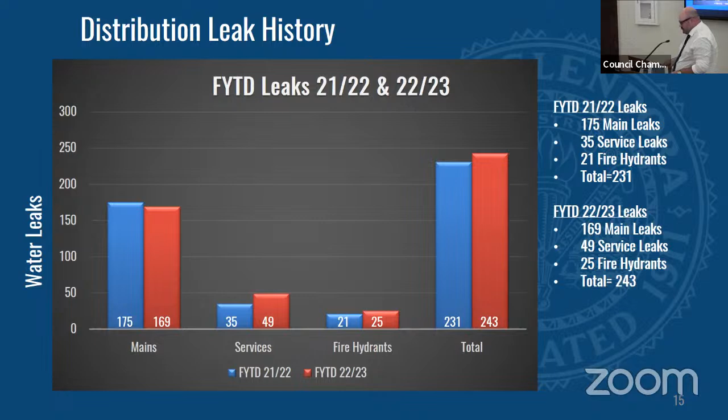And then the overall lookout compared to 21-22 and 22-23 fiscal year to date. Again, blue represents fiscal year 21-22 and red represents 22-23. As of now, compared to last year, from first to third quarter, we are ahead in leaks, and we're just getting more leaks in the past month. So I'll be happy to provide the fourth quarter leak history next meeting.

So here are some notable third quarter water projects that have happened in the past 3 months, in no particular order, and I'll go through these as we proceed. We have the Grand Avenue Arrow Highway emergency project, the 407 West Bennett Avenue fire hydrant blowout, and the Wildwood Canyon Road 6-inch valve replacement. We'll also be looking at our staffing look ahead for water distribution.

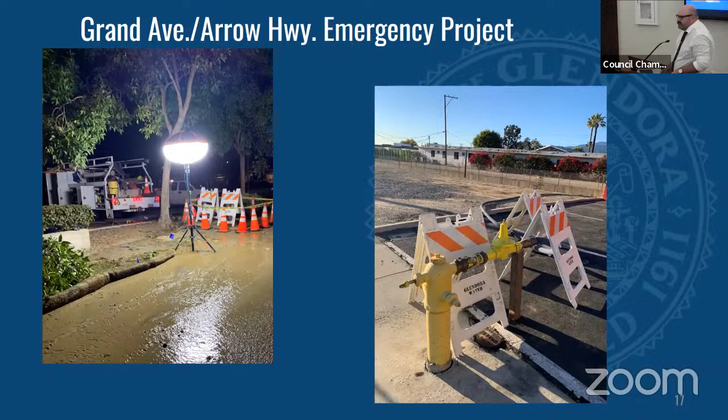From there, we had to isolate that section of line, which was about 200 to 300 feet of 4-inch steel line. It then turned into a 6-inch AC line, which went under the San Dimas wash right there on Arrow and Grand. Because we had to shut that down, we did have to temporarily feed 4 businesses off of Arrow Highway, which you'll see on the picture on the right—that's the highline temporary service feeding those 4 businesses.

That work was completed just recently, at the end of March, and that line is now in service, feeding the 4 businesses right now.

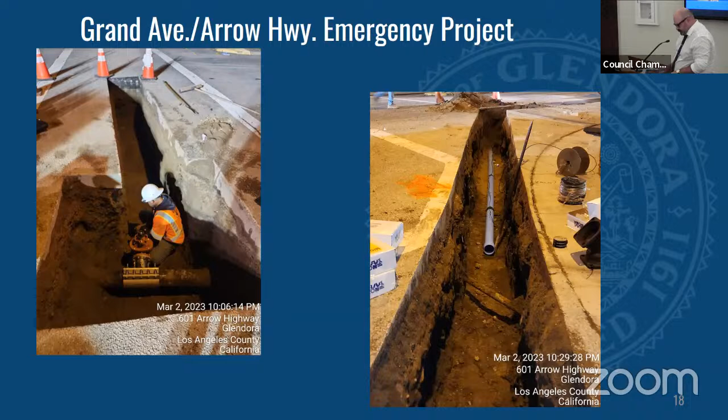Luckily for us and the community, that area is planned for a water CIP, which will most likely get done next summer, and that whole line will be replaced.

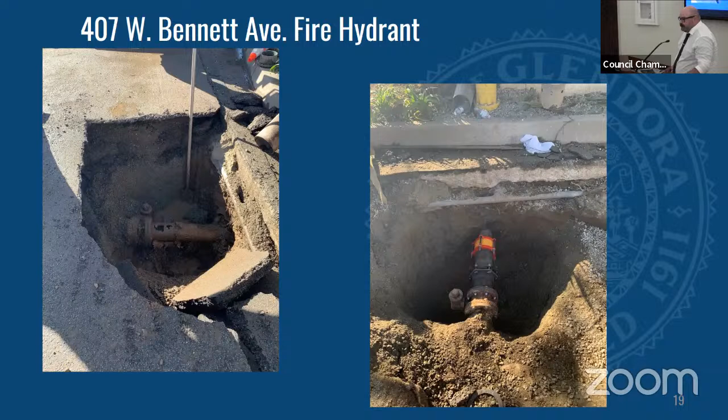So this is our distribution staffing look ahead. Most recently, for 3rd quarter, we did hire 3 new water operators for the distribution crew, and this is the first time in a few years that we are starting to run 2 crews. In the last 3 weeks, we just started running 2 construction and leak repair crews, and we also have 1 position we're filling right now, for the 3rd lead.

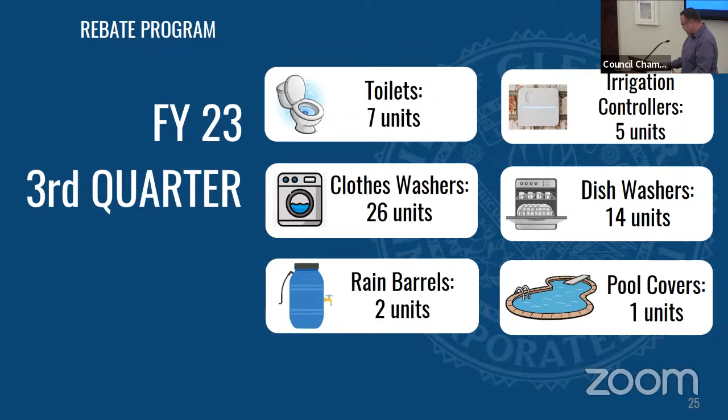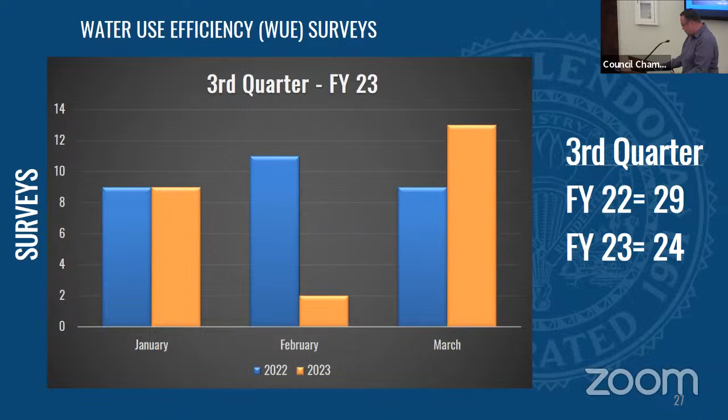For our water use efficiency surveys, WaterWise Consulting performed 24 surveys this quarter. There was a slight decrease compared to last year due to the heavy rains we received, and also because we were training a new staff member this year.

For violations, there were 23 during the third quarter. Occasionally you'll hear us refer to these as green tag violations, due to the actual color of the door tag. These violations mostly consisted of broken sprinklers, excessive runoff, and watering during the rain.

For our turf removal program, we received 21 applications and 29 were completed. Residents removed a total of 44,000 square feet of turf, and we rebated over $82,000 back to our residents.

Starting May 1st, Staff will stop accepting applications for the program, because the funding has already been exhausted. We've been running this program since August of last year. Staff will continue promoting MWD's turf removal program and letting residents know of other available options.

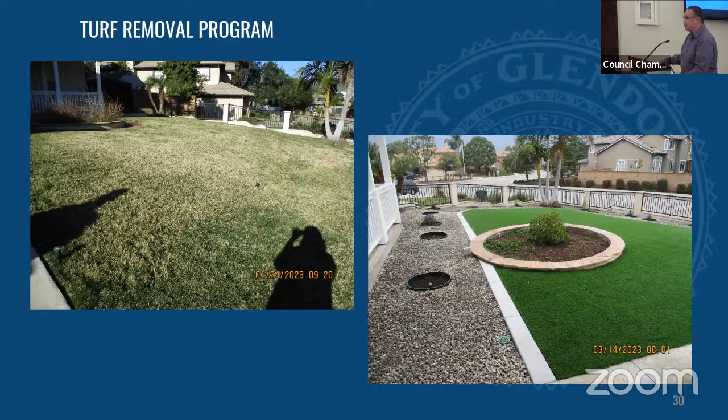For our outreach and educational messaging, we met with our media team, and they recommended we provide a mixture of different posts, educational and promotional. Some of these messages are permanent posts, and others are posted as stories, which only last about 24 hours, so they are temporary.

Staff celebrated Fix a Leak Week, starting March 20th through the 26th. We collaborated with our library department by giving away free water leak kits. In these conservation water leak kits, we promoted our new collaboration with WaterWise Consulting, which provides free water audits to our residents, and we also launched our new irrigation controller replacement and irrigation repair programs on this flyer.

Three staff members became QWEL certified, myself included. This certification allows staff to plan-check landscape irrigation plans, and also allows us to inspect those projects once they're completed, to make sure they've met the state standards for what they told us they were going to install in their plans.

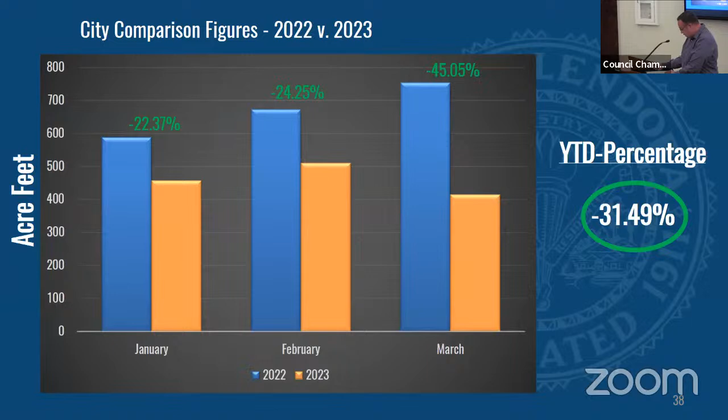So our city comparisons show our conservation reduction figures, starting with the 2022 and 2023 comparisons. We use these figures to help staff assess our current progress with our conservation efforts. This year to date percentage is a 31.49% reduction in water usage. This reduction is largely because of the 30+ inches of rain we received this past couple months. We do expect these numbers to decrease in the upcoming months due to the change of weather. It is getting warmer now.

Our comparisons of 2020 to 2023, these figures are reported to the state on a monthly basis. As you can see, we have a 23.44% reduction year to date. During the past 7 months, we have consistently met the 20% reduction goal set by the state.

This information is being updated on a monthly basis on the city website. Upcoming events on May 3rd, staff will be presenting awards to the winners of this year's 2023 poster and slogan contest. The awards will be presented by City Council, and Water Commissioner staff are invited to attend to be part of the award ceremony as well.

And lastly, our conservation collaboration and our plans with MWD and Three Valleys turf dashboard. Staff has received the turf dashboard data already, but we do not have confidence in the resolution of the images. They're not as clear as we would like them to be. So we are exploring other options right now.

Staff recently met with a company called Eagle Aerial, and they have developed a very similar dashboard with much clearer images. Eagle Aerial is a part of CalWEP, California Water Efficiency Partnership, and over 60+ agencies all over Southern California are actually using this program already. Our current membership with CalWEP will allow us to use this program.

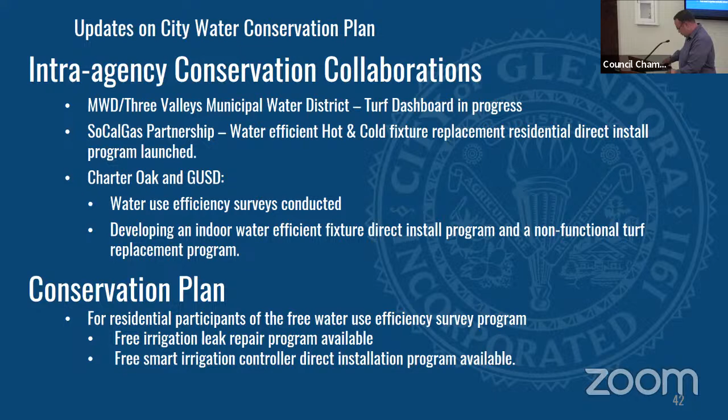And finally, staff will continue promoting our new programs and our message that conservation is a way of life, and that one good rainy season does not mean that we can go back to old habits. And that concludes my presentation. Do you have any questions? Great. Any questions? Sure, Justin.

The La Fetra getting the grant is really, really great. Is there any possibility that we can expand that, or can we educate the other teachers? It seems like a teacher from La Fetra initiated this thing. So is there any way we can let other teachers in the district know that something like that is possible, that it's something they might be able to apply for? Is it kind of along those lines? Are we being proactive about spreading this message that sort of funding is available?

Of course, yeah. Since we are at the tail end of the school year, we are planning on starting to promote it in August. So we could let all the teachers know, yes, this teacher is the one that actually approached us about this program, and we did not know that there's additional funding available. On top of the $2,000 that we are providing for the grants, the school is actually going above and beyond, asking their associations as well to add additional funding, because they are expanding their garden and it's going to cost more than $2,000. So this collaboration has become a bigger collaboration than we ever anticipated. But we will be promoting that through all the rest of the schools as well.

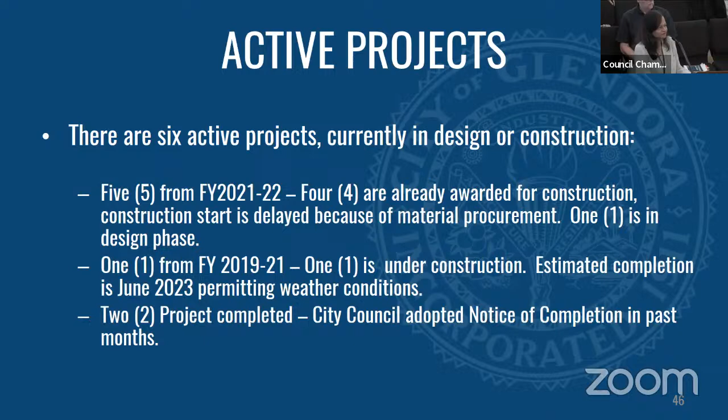And 2 projects have recently completed, and the City Council adopted the notice of completion. These are the project details of our active projects. The Bennett Westridge Water and Street Project construction award was done in February 2023.

One of the conditions for this project is that active construction will be during school break. As of now, we are in contact with the contractor to see if they can proceed or do something during the school break, as it's approaching so near. The contractor is not ready to start construction because of availability of parts, especially for their service laterals.

Cumberland, Palomar Country Club Vista, that is in the northeast corner of the city, a combination of different streets. Construction award is in March 2023. Contractor is working to get the materials. We don't have any date or schedule for when they will be starting.

Mauna Loa, Linfield, Duell, that is east of Glendora Avenue, close to the Freeway 210. Construction was awarded in January 2023. Contractor has submitted their submittals. Material submittals are already reviewed and approved, and contractor is working on the material procurement.

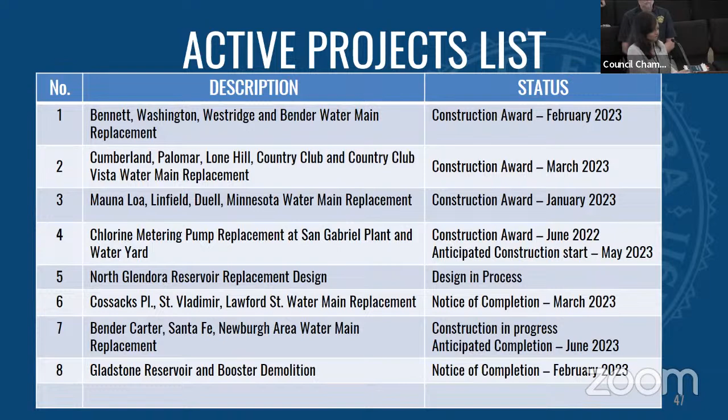The design is to improve the water quality and also infiltrate the stormwater. Tonight, Mr. Oliver Gallang from Craft Water is with us, and he will do the presentation on the Finkbiner multi-benefit stormwater capture project. Oliver.

All right, thank you so much. We're really excited to share with you about this project. It's a really wonderful project, knowing that you're building something that protects the environment.

So with that, here's an overview. As Malia mentioned, this project did receive funding for design through Measure W, which is a property tax on every resident. It was approved by the voters a few years back with over 70% approval, with the intent of providing water quality improvements, water supply benefits, and things like that. So really great program, and the city of Glendora was successful in receiving funds for design.

And then we can talk about the next steps. The nice thing is we get to do an overview about the project, and hopefully you'll find it's something really valuable to the city of Glendora and a project you can be proud of.

So the primary objective of this is to develop a regional stormwater capture project. What does that mean? It means it's a facility that creates a very big impact in water quality for the city of Glendora as well. Primary objective is to improve water quality within the upper San Gabriel River, and secondary is you have the opportunity now to restore and rehabilitate the park facilities.

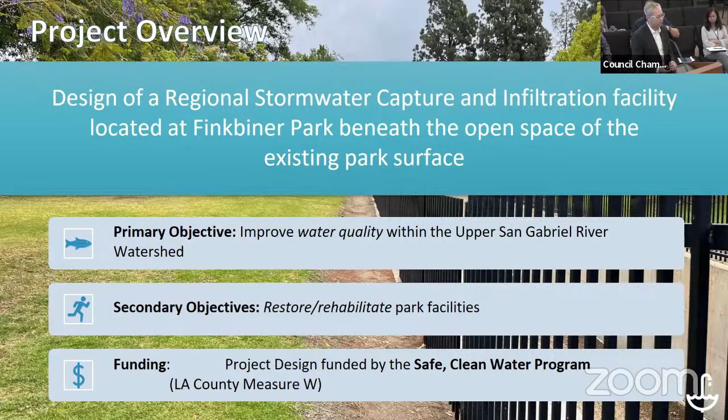Funding for the design, as Malia mentioned, in the order of 2.4 million, was awarded to the city of Glendora, and so the project is underway. Why is the city of Glendora undertaking a project like this? Well, the city is required under the NPDES permit to reduce water pollution and improve water quality.

And the city, as a member with other jurisdictions, is a member of the Upper San Gabriel River Enhanced Watershed Management Programs. Essentially this is a plan that was developed in partnership with other cities to show and demonstrate to the regional board how runoff coming from the cities can be improved through these types of measures.

As mentioned before, Finkbiner Park is adjacent to Little Dalton Wash, and I'm sure everyone loves that park because it is a beautiful park. But it's also strategically located next to Little Dalton Wash, which makes it a really great opportunity to put in a water capture facility.

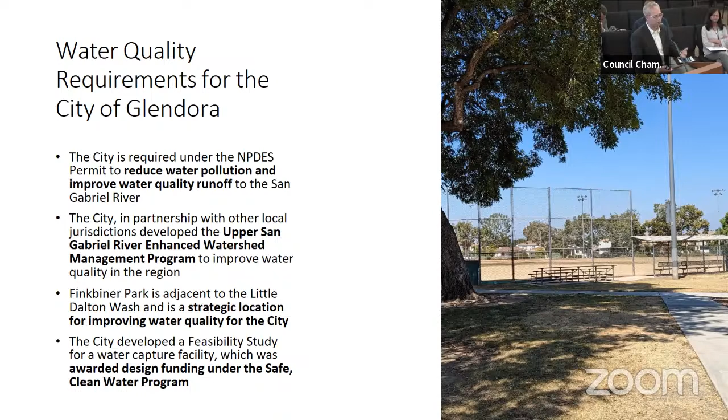And so the city, as a member, developed a feasibility study, which is a requirement to go after regional infrastructure funding through the Safe Clean Water Program. A feasibility study is required, and so that was developed and funding was successful. So now we get to talk about what's happened since.

Here's an overview. You can see the drainage area that comes into Little Dalton Wash. It's a fairly large area, you're talking about 1,500 acres, but of that 1,500 acres, 272 acres are developed, and that's where the majority of pollutants are coming from.

And so the key benefits to the area is definitely its water quality. There is potential for water supply benefits because the infiltration rates at the park came in really high.

They're exceptional, and so you are able to treat water through infiltration. I hope you were happy to hear that, because that does replenish the groundwater.

Others involve applying nature-based solutions, creating passive enhancements to show how we can improve the environment through nature-based strategies. Others are community investments, investing in our community. These are all the pillars that the Safe Clean Water Program is founded on, because the voters really wanted to see water improvements, water quality improvements, but also benefits to the local community, using nature, more natural systems, and leveraging funds that you can pursue, and then getting support.

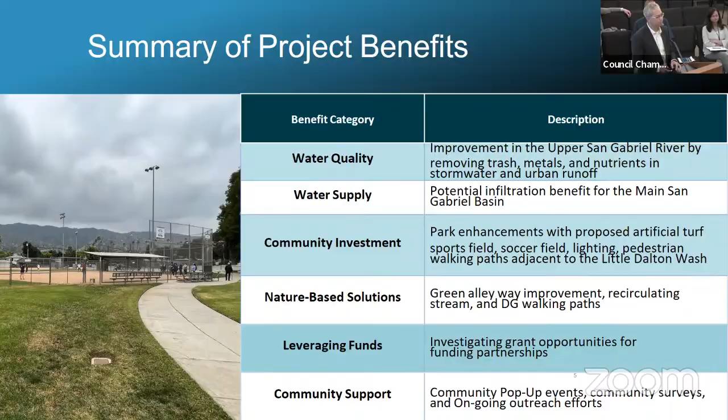There's a pre-treatment system called a hydrodynamic separator. But if you want to picture what that means, because that sounds really complicated, just think of a toilet bowl spinning around because of the velocities of the water. All the heavy silts and sediments drop to the bottom, and that's how things are treated. So that's the initial filtration system.

Within this underground reservoir, there is a baffle system, an additional wall that can slow down additional flows, because what we're trying to do is clean the water up as we take it from the channel. Once it gets over the baffle wall, it goes into the large infiltration area where it can infiltrate back into the ground. We've also added a pump that can pump water from this reservoir into a recirculating stream, creating that natural creek as well.

In addition, we've added a filter system because there's so much water coming down Little Dalton Wash, which I'm sure you've seen, that we have the ability to use a small pump, filter it again with an additional filter, and then send water back into the Little Dalton Wash. This creates additional performance out of the system.

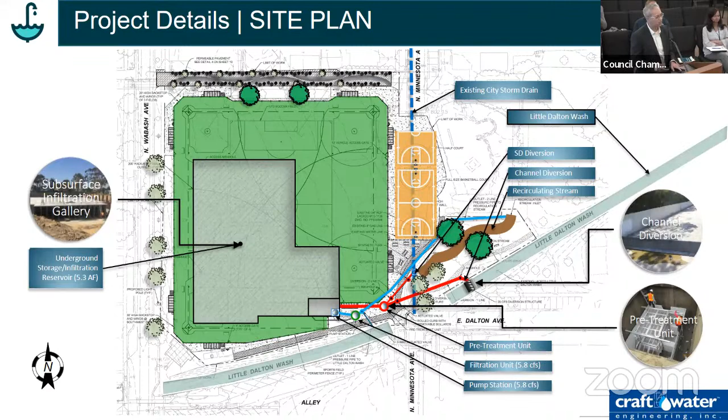One of the things about this project originally, with a feasibility study, was somewhere around 19 acre-feet, which is a pretty big reservoir. Through optimization analysis we've done, looking at the watershed, looking at how we can balance water and maximize pollutant load reductions, we're still able to treat water quality but with a smaller, more efficient system. So we went from a 19 acre-foot facility to a 5.3 acre-foot facility, and you can see the improvements as a result.

Some of the things we're proposing on the surface: artificial turf on the turf field, which gives soccer players and baseball players a year-round facility, which is nice. So if it rains the next day, it's still available to use. My kids used to play soccer, and I think that was important.

But you can also see the alley on the north. We would also incorporate some additional landscaping, turning it into a green alley with permeable pavement along that alley, and rehabilitate the pavement that's there. Then, as mentioned earlier, the recirculating stream takes advantage of the underground reservoir working in concert with it, giving the community, like education programs, a way to connect with the system through a recirculating stream as well.

We're also adjusting some of the baseball fields so it's a little more efficient, and we've actually expanded the basketball courts — we have a full court and a half now. So those are some of the enhancements, as well as incorporating additional paths along the area.

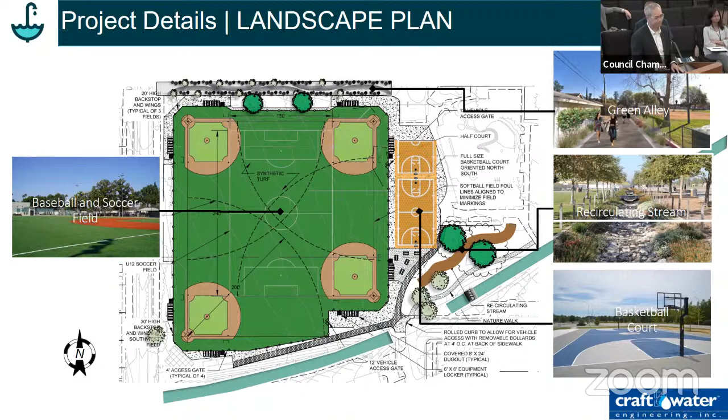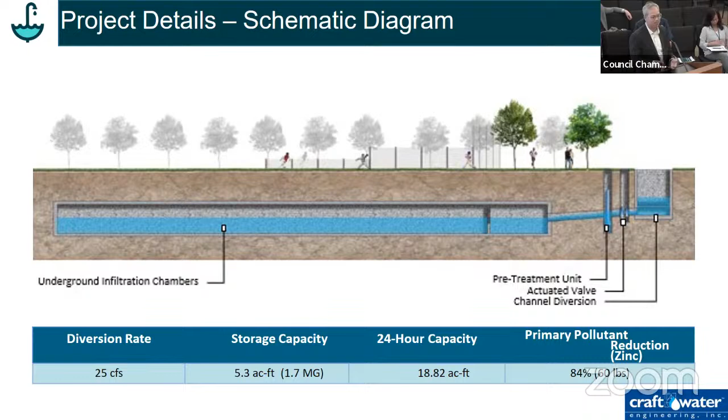Then there'll be a pretreatment unit, the hydrodynamic separator, to clear filter water, the settling chambers, and you can see the underground reservoir there. The physical structure is 5.3 acre feet, but when you account for infiltration and pump filtering in the system, in a 24-hour period, this system functions like a 19 acre foot facility. So without building a big facility, you're able to perform with a smaller footprint, which has less impacts, meaning the baseball field can get back in operation sooner, which we feel is important.

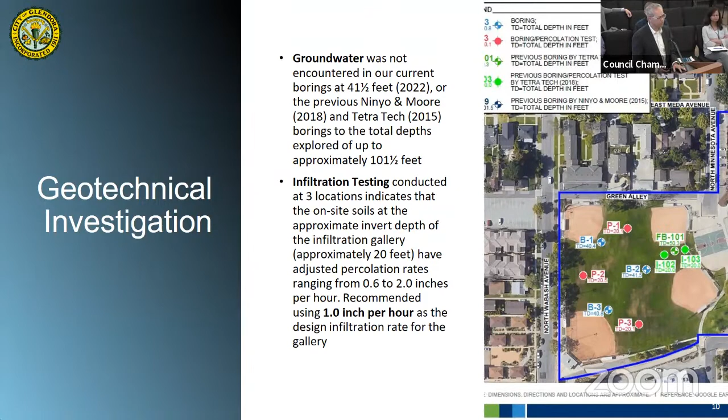As I said, the geotechnical investigation came in with really good infiltration rates, somewhere up to 2 inches per hour, which is wonderful. It's based on a 1 inch per hour design, which is really good for this location.

Community outreach has been active since August. One of our teaming partners, Active SGV, has been at the soccer fields, and at the movie events. They're really boots on the ground, talking to the local community to get their feedback about this project. There'll be additional outreach for sports councils, Kiwanis Club, and Rotary Club as well.

As far as the CEQA status, it's important to check all the boxes and really address the environmental impacts overall, making sure we mitigate communal effects as a result of construction. The CEQA documents were initiated last year, and we anticipate completion in September of 2023. If funding is obtained for this project, we could move along pretty quickly for a construction start sometime in June 2024.

So where is the funding for construction coming from? The Safe Clean Water Program, once they funded design, the intent is to support you towards construction. In July of this year, the city of Glendora will be submitting an application through Safe Clean Water for construction funds for this project.

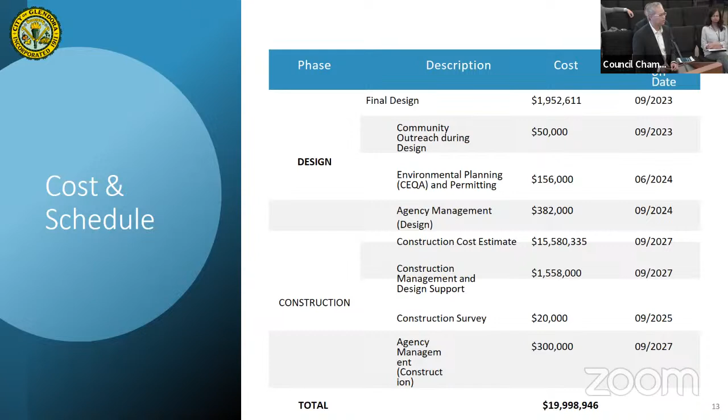So here's the overall schedule. Right now we're working with a budget of somewhere around $15 million for construction for this project, and that's the objective here. With that, I think Billy and I are available for questions. Thank you very much.

All right, great report. Any questions, Mike? Yes, thank you. For this project, what's the cost benefit? How many acre feet versus... we're the city, residents of Glendora, we're only getting that Measure W on our property taxes. That'll fund it all? Yes, that's the intent. What's the cost benefit for all the acre feet you're getting out of there for $20 million? It runs down the wash and picks up the same amount of dirt before, it's supposed to be cleaned up before it hits the Whittier Narrows. Yes, that's correct, before it goes further down.

Roughly with a 5.3 acre foot facility, as far as infiltration, you'll probably see somewhere around 53 acre feet a year that would be infiltrated back into the ground. However, you are getting somewhere around 200 acre feet a year in water quality treatment benefits, which is really beneficial to the regional board. The system does treat pollutants, providing pollutant load reductions in the order of 80 to 90% with this system. So those are the benefits.

The thing is, you can't just say, okay, well, it's $1,500 per acre foot for water supply, and you're only getting 50 acre feet. The idea is it's multiple benefits. The water quality benefits protect the city to meet the NPDES requirements. There's also water supply benefits, and there's community benefits as well.

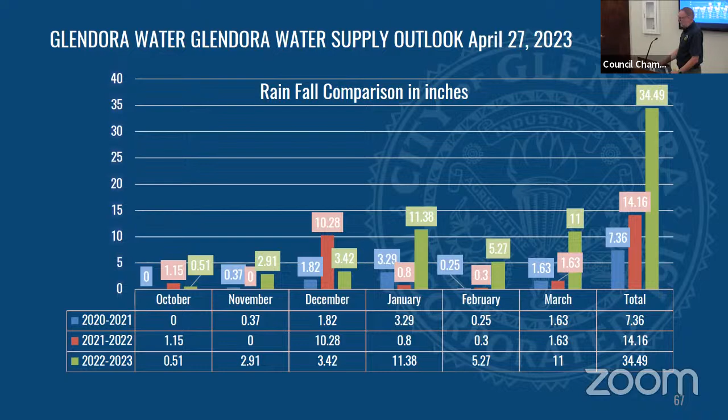As of January through March 2023, the following agencies didn't make any deliveries to the San Gabriel River. They were all of our main providers: Upper District, Three Valleys, and San Gabriel Valley Municipal Water District.

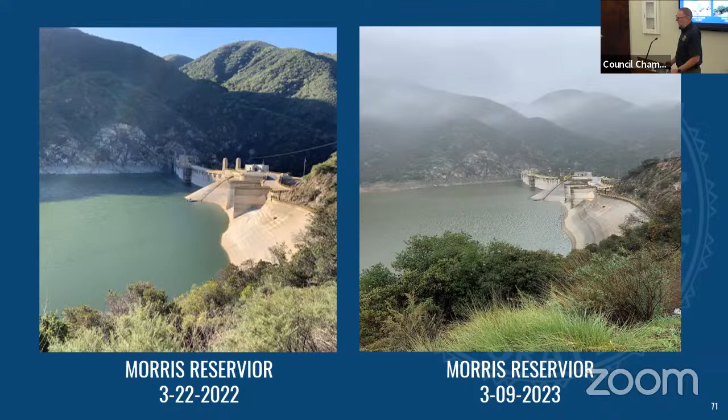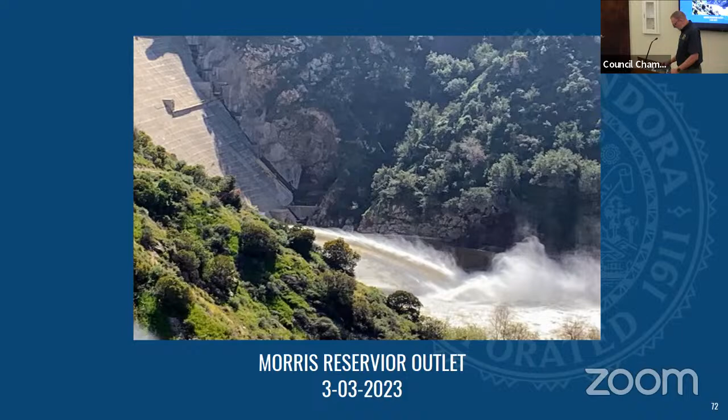All right, we're going to talk about snowpack. I will also provide updates for these, and this is as of April 4th. The northern snowpack was about 192% of normal, with the peak recorded on April 20th at 199%.

The upper Colorado Basin at that time of April 4th was 159% of normal, also peaking on April 20th at 165%. The Colorado system is a little different.

Lake Powell recorded at April 4th at 22%, has only climbed a small percentage up to 23%. And then Lake Mead recorded on the 4th at 28%, has only climbed to 29%. So Colorado hasn't yet seen any dramatic impact from the storms or even the snowpack.

Storage in California as of April 4th was up due to the heavy precipitation and conditions. The average over all the reservoirs, but a few, was about 82%. As of the same time, April 20th, we're at about 95 to 100% on a lot of our reservoirs. There are a few that are not.

The biggest change in this slide, to me, as somebody who's worked in the water industry for quite a while, is even on April 4th they had the supply allocation up to 75%. As of April 20th, that supply allocation is up to 100%. So they're filling some of the reservoirs further down south, such as Diamond Valley Lake and Skinner, as we speak, with the excess water coming down from the state project.

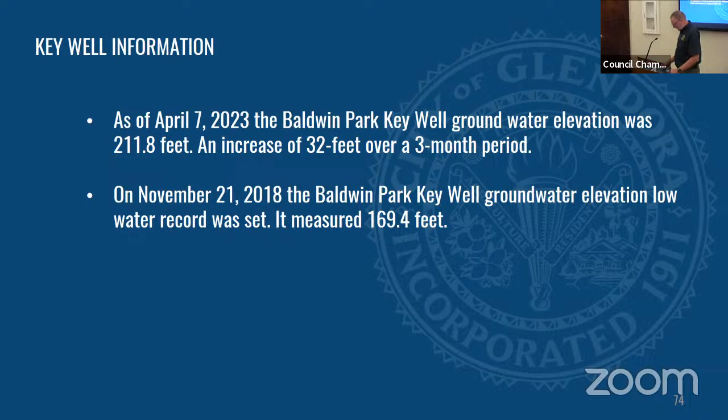As of April 7th, 2023, the Baldwin Park Key Well measured about 211.8 feet. That was an increase of 32 feet over just a 3-month period, a very dramatic incline. The update as of April 21st, that water level went up to 221.4 feet, which is an additional 9.6 feet since April 7th. With that continuing spreading coming down into our main spreading grounds, hopefully through May and June, we should see another pretty good rise in elevation into that aquifer.

This is our water production and treated water purchases for the first quarter of 2023. Well production in January was 457.3 acre feet. February we were up to 510 acre feet. In March we were back down to 415.23 acre feet. Those two months, January and March, were the highest rain accumulations for this quarter, thus a reduction in production that was needed. We didn't purchase any Metropolitan Water District in that period.

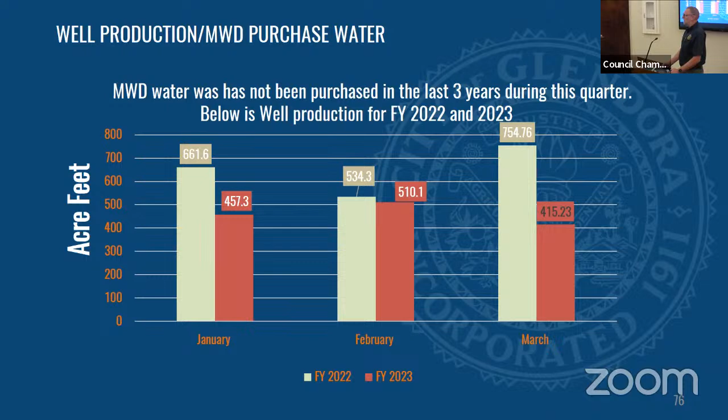This is also to show you a visual. Fiscal year 2022 is in the tan color, fiscal year 2023 in the red. This is our acre feet of production. We didn't purchase any met, so there's none on here. This is all our production. And if you note, this year is actually less production in all cases, and that was just due to all the heavy rain we had. People were just not taking water.

All right, to the good stuff. Water Division did tours on March 6th and March 10th. The following locations, we went up to Azusa Canyon, took a tour down the San Gabriel River into the LA Spreading Grounds, and the San Gabriel Pumping Plant. We did one tour with Justin Nakano, another tour with Pat and David. These are just some slides from that.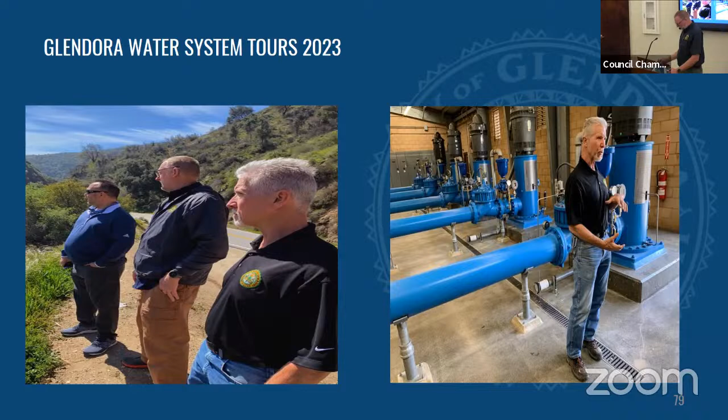After that, that's all I have. Any questions? Great, questions?

David: Well, I just wanted to thank Dale and Ron for the great tour that you gave. That was very, very educational. It was so cool to see the chain and the way the water is distributed here, and it really gave me a much clearer idea of how things operate. They also showed us the control panel section at the water yard itself, which is pretty impressive. That's the SCADA system. They actually started at the yard and then we took them up, so they got to see not just the conveyance on the way down, but actually our pumping facilities in town.

Justin: I just want to also say thank you for that tour. When I first started on the commission back in 2016 or so, I went on a very similar tour, and to kind of end my time on the commission with another tour - actually, I think 2016 was a pretty rainy year too. Yeah, '15, '16, but not like it was this year. So it was really neat to see all that. So thank you. No, you're welcome. Mike and I have yet to go on the tour. Three-hour tour.

Yes, it's about 3 hours. I did have a couple of questions regarding the canyon spreading grounds. Are they full? Yes. Okay, and then the water's going down to Santa Fe spreading grounds? Yes, it is. And out of Santa Fe Dam, they're diverting it to both sides.

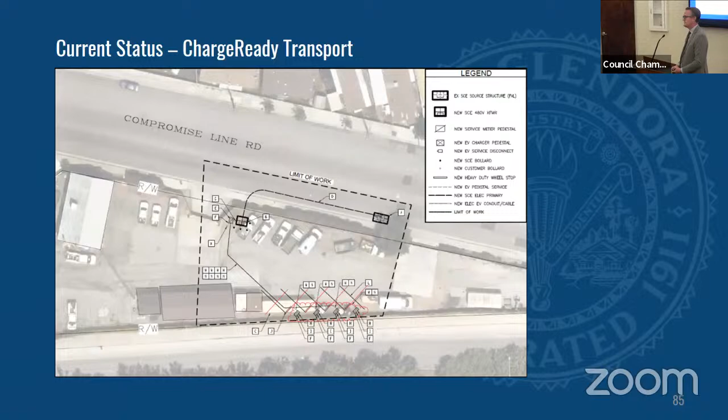As part of that, we've been successful in securing Air Resources Board grants for purchasing DC fast chargers, which can charge our buses in about 3 hours. That's a major concern for transit operators moving to zero emission, as the range just isn't there. We have relatively short routes, so we're able to do opportunity charging during the day, and we're pretty confident we'll keep our buses moving throughout the day.

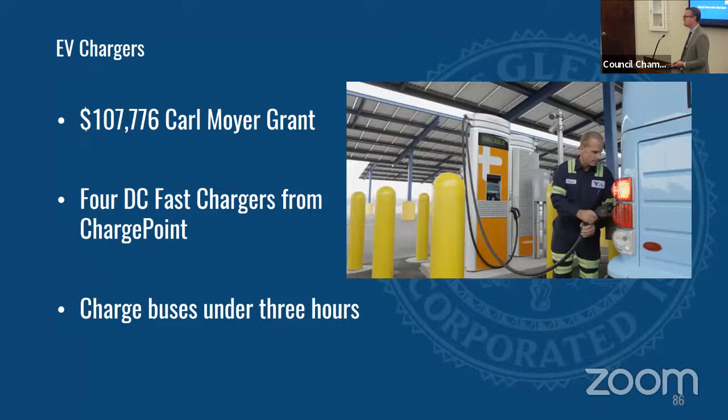Pictured here are the first 2 buses we're purchasing. They're from Green Power, based in Rancho Cucamonga, and assembled in Porterville. These carry about 26 passengers and have an advertised range of 163 miles — probably a lot less once you factor in driving and air conditioning — but these will last about 10 years.

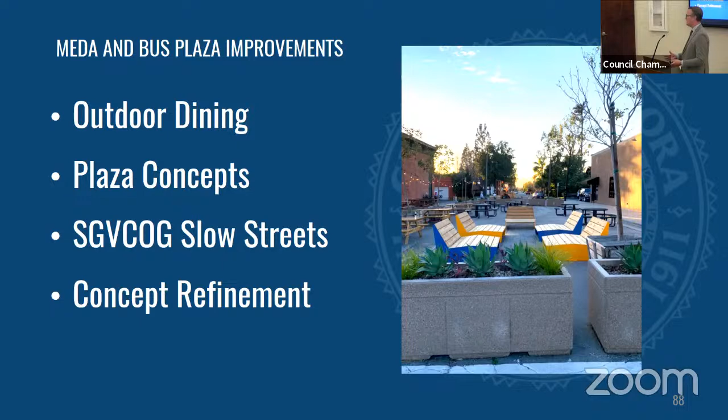The other half of what my division does is bike and pedestrian planning for the city. Some of you may notice the construction in the village right now — that's one of our projects, the Meda Avenue and Bus Plaza project. It came out of the outdoor dining and COVID restrictions we had, and we've done about 2 years of outreach and design work to get to where we are now with fully implementing the project.

This is the layout view — the East Plaza near Stubborn Mule. We'll have games, cafe seating, and one of the things really pushing the envelope is a fire pit on the street. I believe we're one of the only cities with a publicly operated fire pit, joining a very small list of cities that have repurposed their streets to create new public spaces downtown.

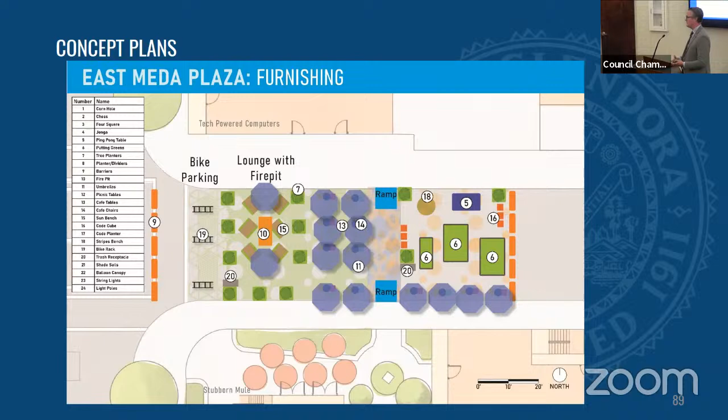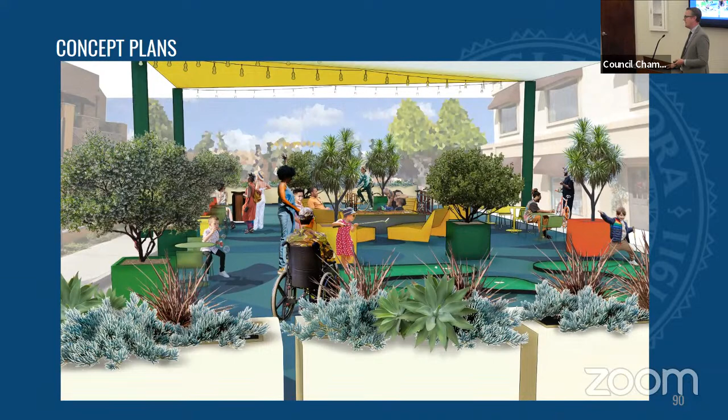This is looking towards Glendora Avenue along Meda — you see the games, fire pits, seating, and landscaping. On the west side, near Frisella's and Sushi Nai, we're adding additional outdoor seating and games. The idea is to get people to stay downtown, eat, and spend money — really treating this as an economic development tool in addition to providing public space.

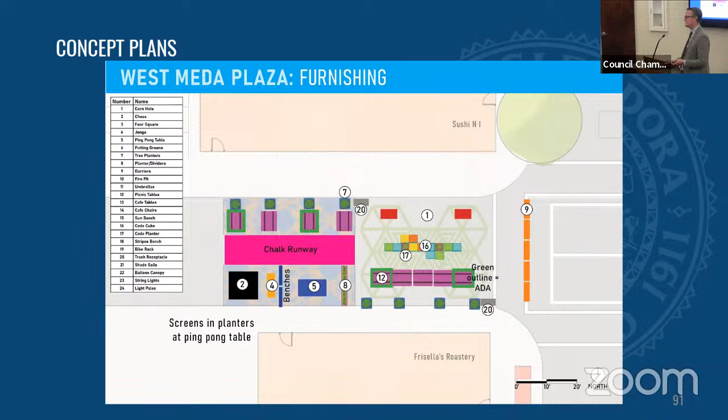One thing I'm really proud of is that we're working with a local muralist to paint the street — that's the blue floor you see. These are the same muralists who painted the Glendora mural on the side of the building at Bennett in Glendora. Both grew up in Glendora, still live here, and are actually out painting the street this week. We're making great progress on the project.

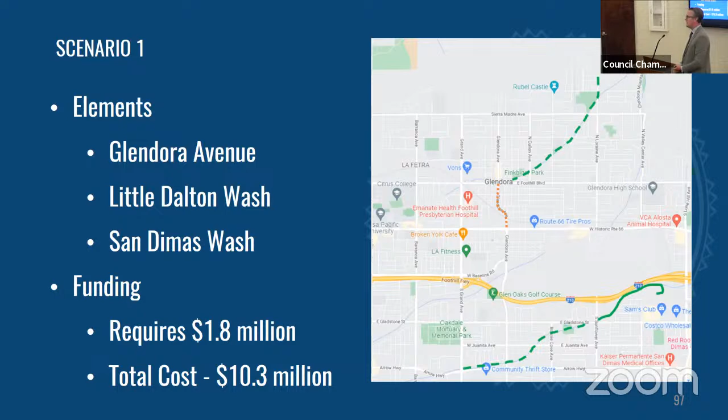That will include completing the San Dimas Wash extension. Right now we have an existing path from Pompey Park to Sunflower Gladstone. The next extension is 1.5 miles to Grand and Arrow — we're in final design and working with LA County and Army Corps on construction permits. The same project continues on the Little Dalton Wash and on Glendora Avenue, which will be an on-road separated bike lane.

So this is the San Dimas Wash project. We have 2 opportunity areas for new pocket parks in the city. This is at Gladstone and Sunflower. Speaking to residents, they wanted workout equipment and additional seating. As you can see here, this gives you a sense of where the bike path would go.

This is as the path goes through Gladstone Park. You'll note here that there's native landscaping, additional seating, water fountains, and a bike repair station as well.

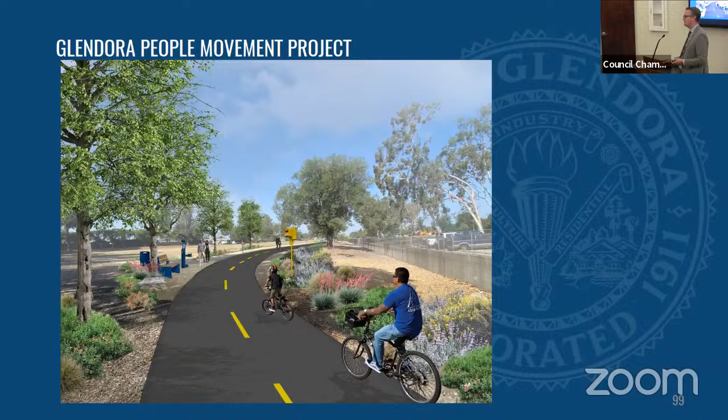And then towards the end of the project, this is near Grand and Arrow. We have another opportunity to do additional landscaping - again, drought tolerant native landscaping and additional outdoor seating for people to rest and recreate.

So as I mentioned, this is now getting to the first last mile sections. This is Glendora Avenue at Ada by the post office, and this is with the roundabout. You'll notice too, we are going from 2 lanes to 1 lane north-south here. Part of that is due to Glendora Avenue being excessively wide with not a high volume of traffic.

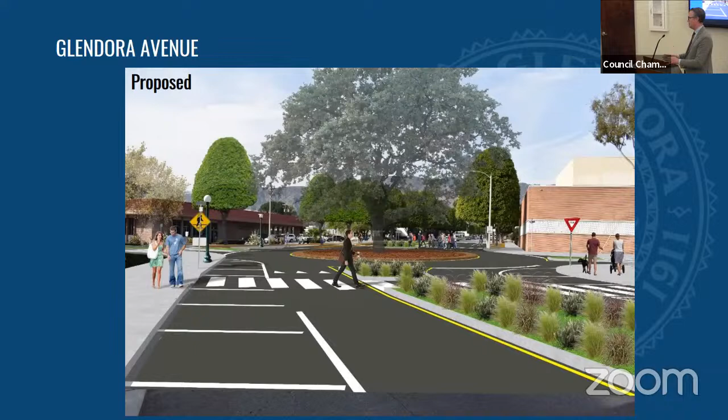So we've observed a number of speeding issues as well here at this intersection, failure to stop at the stop sign. I've gone to that post office, I'm sure we all have. It's a little bit hairy trying to walk across that intersection. So a roundabout here really felt like the best middle ground between a stop sign and a stoplight.

This is looking south on Glendora. And this is, again, visioning some of the economic development that can happen as part of these projects. You'll notice on the left is a raised protected bike lane. We are maintaining all parking, so there's no parking reduction as part of this project, and hoping to see additional extension of the village feel further south towards the station.

This is at Carroll and Glendora, so right near the library and PD. And this is with a mid-block crossing and some of the other treatments. I'll note here too, this is one area where we are partnering with Public Works and looking at ways to do stormwater capture on Glendora Avenue.

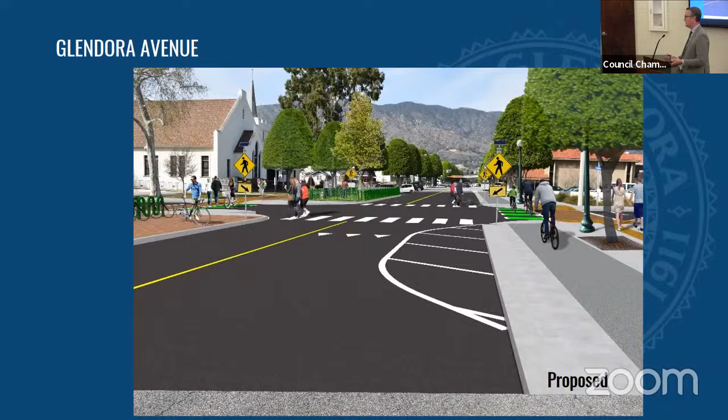I remember when I started here, I was stunned at how much Glendora Avenue floods during heavy rains. And so based on that, we know that there is opportunity for stormwater capture on this project - so looking at ways of having co-benefits from transportation investments here.

And I think one of the most innovative parts of our design is at Foothill and Glendora. This is what's called a protected intersection. The logic here is that you keep cars in car lanes, bikes in bike lanes, and pedestrians in the crosswalk. That green path you see there, bicyclists, in order to turn left, will follow that green path around. That prevents bicyclists from going over 3 lanes to make a left. It gives cars better visibility as they're turning right, looking for pedestrians and bicyclists.

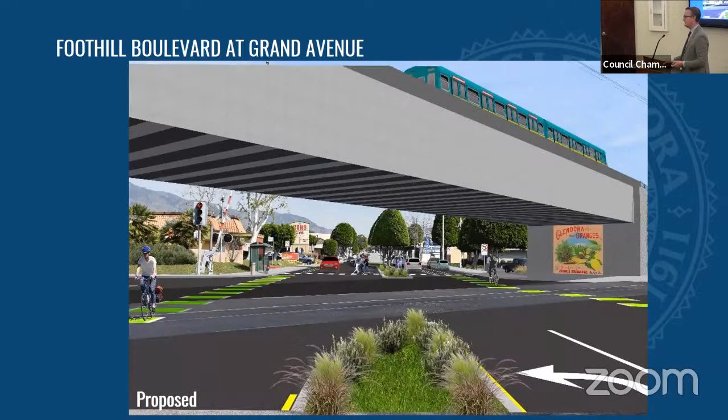And this is at Foothill and Grand Avenue. This is obviously the bridge now in place, so that's great. Here we'd be looking at adding a bike lane from Citrus College essentially to the village, so that it's a safe place to bike for students going to Citrus College. This is also looking further east on Foothill, and again, hopefully seeing some of the economic development that comes with additional public investment in this area.

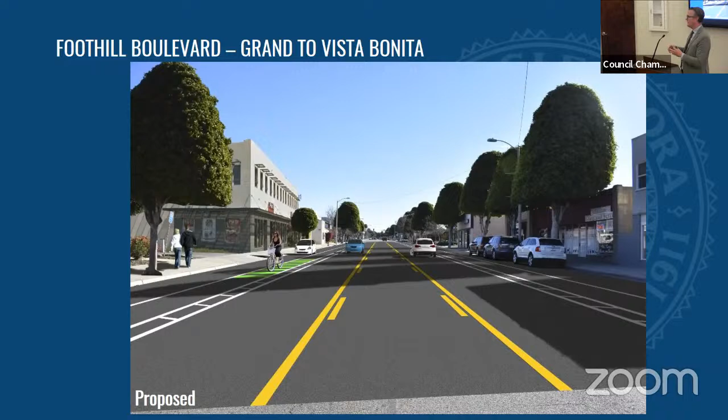So Foothill Boulevard is interesting in that for most of its length, it's 1 lane each direction. Then in a couple areas it accordions to being 2 lanes and then goes down to 1 lane. So we're making it a standard 1 lane each direction throughout the corridor.

As I mentioned, we've done a couple demonstration projects. One you'll see in the village right now, which is at the crosswalks.

And then in the village, we're doing a similar demonstration right now. Again, similar issues of failure to yield to pedestrians.

So we narrowed the lanes, added a pedestrian refuge, and added additional signage to indicate proper yield positions for vehicles. And with that, I can take any questions from the commission.

Thank you. Questions? Michael? Glendora will go for a road diet, moving the lanes off there on Foothill. I'm not going to say much on this thing. I've lived here for 30 years and I know that's going to cause some issues for residents.

My big deal, and I've talked to somebody in your department over the years, is all the streets controlled by the construction for the rail line are on timers. They just run through their cycles. You want to save gas and avoid irritating drivers. Why can't we change those lights so they're actuated? Like the best one in this city is Lone Hill and Route 66. Why can't we do that?